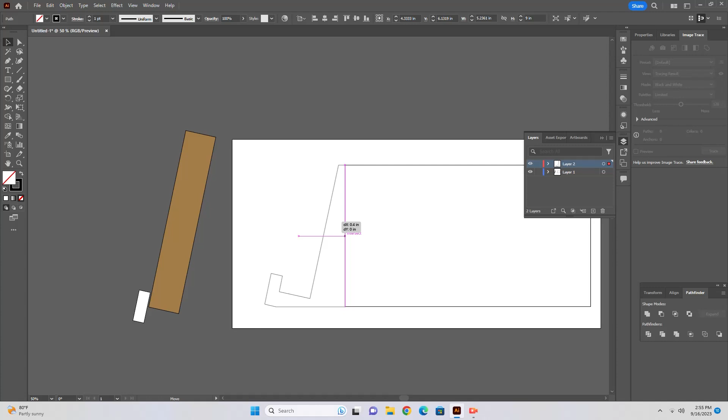I'm not going to go through and describe every single thing I'm doing here, I'm just going to let you watch, and I think it should be pretty self-explanatory. I don't want to waste 30 minutes of this video showing me creating the layout for this metal stand, so I'm going to speed up the video and let you watch the process. If you really want to see each detail, you can slow the video down in your player and pause it.

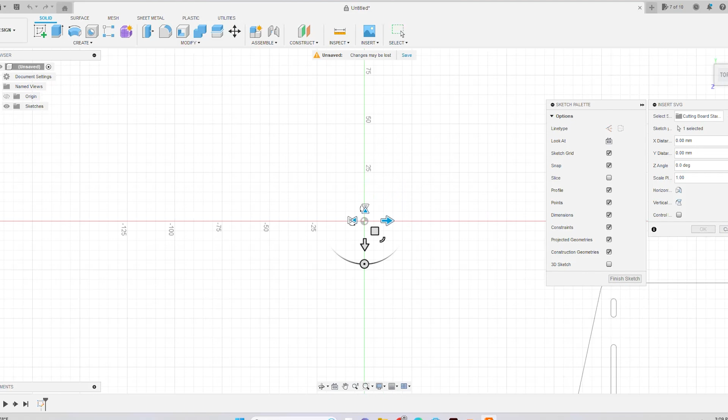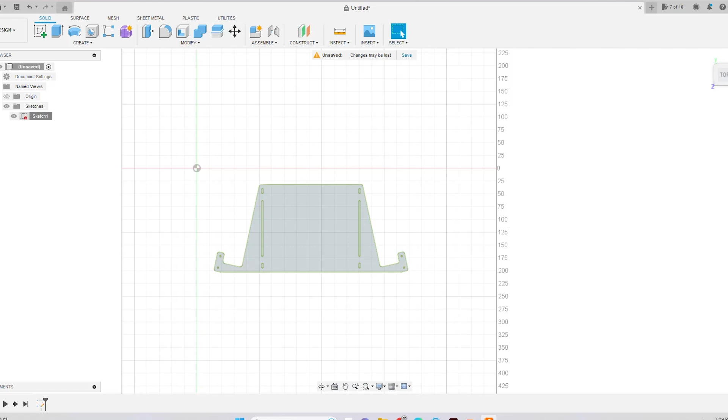Now I'm going to go into Fusion 360, and the first thing I'm going to do is import my SVG. Once I've imported it, I'll place it on that XY plane. Then I'm going to go up to Inspect and Measure to make sure this thing is the right size. It's not, so I'm going to have to come up with a factor to scale this up. This will be 228.6, or 228 divided by 171, which gives me the factor I need to scale it up.

Once it's scaled up, I'll go ahead and extrude this 1.6 millimeters so that I have a real three-dimensional object to work with. Once I'm done here, I'm going to go to the Manufacture tab and create a new setup.

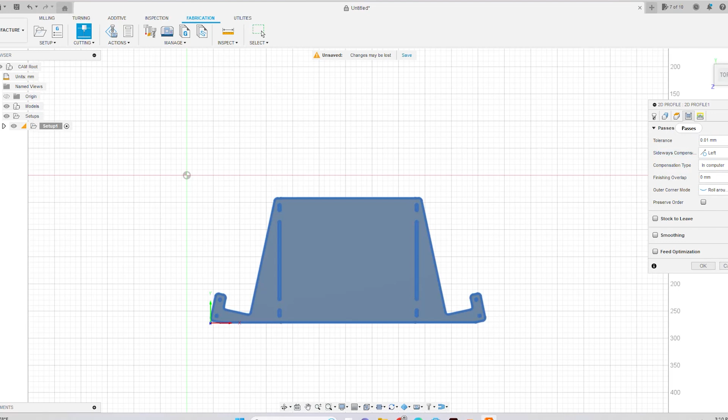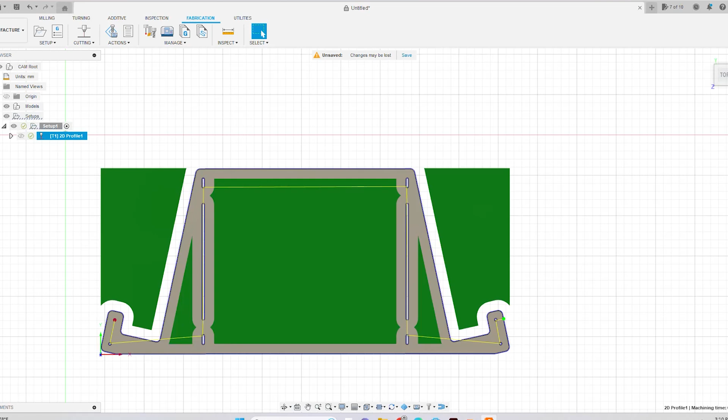I'll just change my origin to the bottom left-hand corner. Once that's done, I'll go up to my cutting tool and start creating all the instructions for how to cut this item. All I have to do now is export this to G-code, and I can fire up my plasma cutter.

All right, so now I've got the cutting board stand cut. All I'm going to do now is take this kind of hard, rigid putty knife and go around the cut marks here, chipping off any small pieces of metal that are there.

I'm telling you that because I'm not going to do this for you. When I send you these, I'm going to send them right off the cutter, and that's because it's the only way I can keep it cheap for you guys.

So all I'm going to do is, with my putty knife, go over the back of this and chip off any of those little pieces of metal that are stuck to the back, and then we'll be ready to go.

Next thing I'm going to do is give this a good sanding. I'm going to use basically 100 grit sandpaper, and then maybe 220, or you can just start with 220 — it really doesn't matter. All we're doing is trying to get it smooth enough to accept paint.

All right, so now I've got the cutting board stand sanded on both sides. I don't have any protruding marks or little bits of metal anymore from the cut. This is as far as I'm going with the sanding of this — you can go as far as you like. Basically, I'm just going far enough to take off any scale or other contaminants before I paint it.